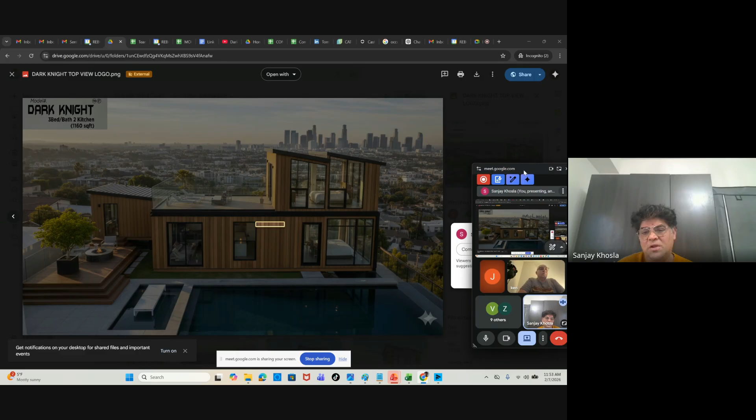And the reason this was built this way was because we built it so that we can duplicate it and use a lot of those concepts. You guys may have already heard of verbages like DFMA, panelization, modular, and modular integrated construction. So those principles, how do they apply? Hence we started with a smaller prototype, like a crawl, walk, and run.

Really in this community, what we're attempting to do, rather than go big and talk about 200 units, we want to be able to model 2 boxes and use all the different principles from a DFMA componentization perspective, and really iron out all the bugs from a training perspective, and see how those components get approved according to Ontario standard.

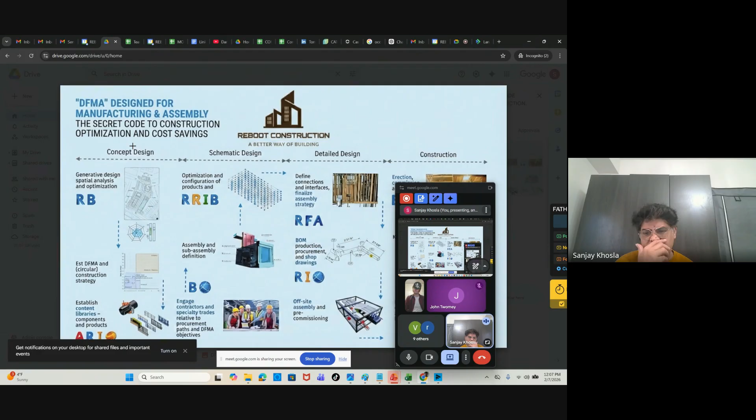I know there's a company out of Texas doing that, but again, a lot of noise because it's only addressing the shell, the envelope, which you can easily use through panelization. So how do you use just panelization power to cut costs and arrive just in time, cut cost on labor, cut cost on different components, and have them approved at the same time?

How do you get to that holy grail? And having gone through all this R&D, I think the secret code lies in DFMA, which is design for manufacturing assembly. And DFMA, in my mind, is not just a few components - like you have a wall panel, a full wall with a window panel, a roof truss.

Yeah, those are great components. But I think this entire life cycle that's being demonstrated - bearing this in mind, this is almost like writing a software product. This is how we do analysis, design, construction, testing. This is a life cycle for software development out here. So how do we take that framework and apply it in the DFMA?

As I just shared an example of generative design - once you come to this level, you can give an investor a package saying you can build 6 units and this is your cash on cash return, quickly, not making the investor spend about $30,000-$50,000.

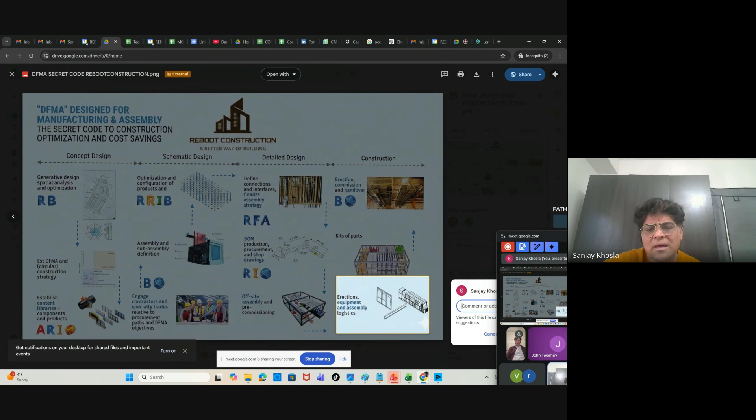We've held their hand and really closed the loop out here. This achievement of hand-holding the investor from birth to handing over the keys in this discrete DFMA manner, I believe is super critical. I'm going to pause here because I'd like this to be more of a community effort. I don't want only my ideas to be entrusted, so I'm going to invite some thoughts on DFMA, or their points of view here.

Folks, I'd like to see your point of view on what we're talking about with DFMA. I know, John, you've done a lot of this componentization, working with companies that are already doing it. What are your thoughts on what we're sharing and trying to do? Are we headed in the right direction?

Totally. I think modular fabrication, by its very nature, is DFMA. Prairie can attest, we would have 70 pages of details for a chassis, for a kitted out chassis. And Prairie, remind me, were you a SolidWorks designer? What platform were you working with?

No, I was a Revit designer. Okay, well, all of our architectural drawings are in Revit, but with SolidWorks we would produce LOD 400. Everything was about how to make it simple for the shop, and I think we kind of solved that problem a couple years ago. Go ahead, Brian.

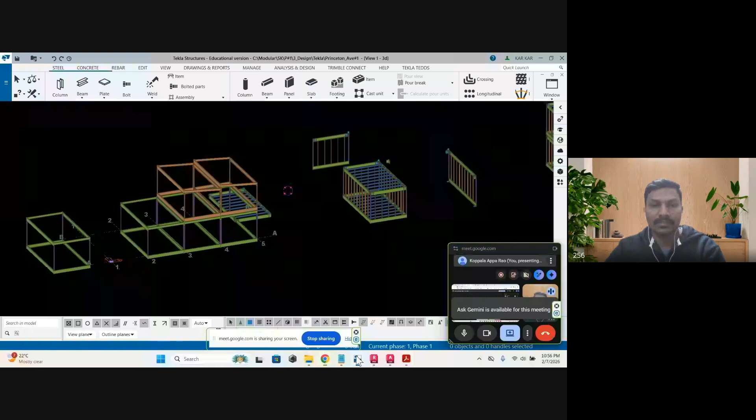Are you able to see my screen, sir? Not yet - yeah, it's coming up. Thank you, Koppala. Yes sir, this is the model that I have prepared. It's in a very basic shape only, but I've worked on the connections and the box frame, the moment frame, how the skeleton of the structure can be done.

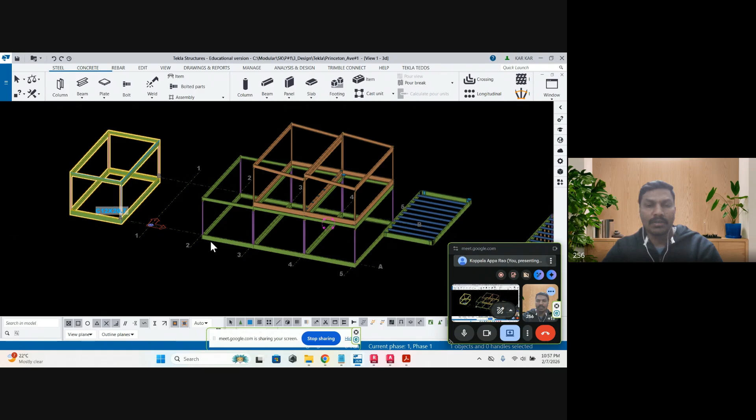This has around 4 modules on the bottom and 2 modules on top. This is already prepared to make the LGS structure inside it, so that we can put in LGS studs and all, and then finalize the design.

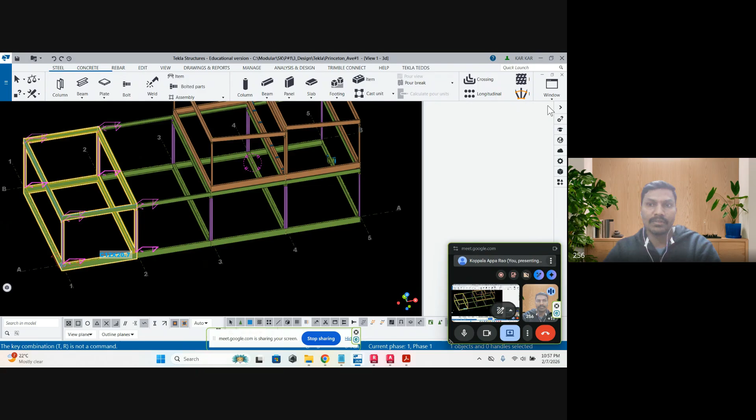So all together, if we combine, it will look something like this. So all 4 modes - 6 modes - are separated. It can be shipped separately to the site with all the finishing like floor finishes, ceilings and interior everything. You can combine and install everything in the factory and then ship it to the site.

So each module can be connected to other modules at the site using small, simple connections. I'll show some sample connections for how it will be connected on site. We have a bolted connection at the corners so that fixing can be done even on site or even in the factory.

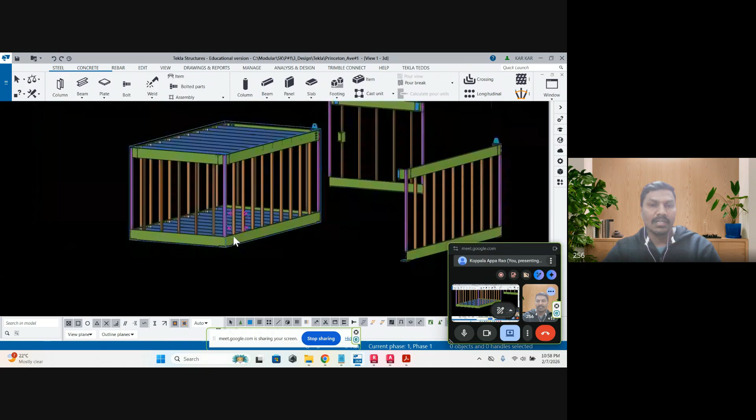So the module box contains one base frame at the bottom with 4 C channels, and one ceiling frame at the top. The top 4 C channels form the ceiling frame, which will support the ceiling members and floor joists, and can also support loads.

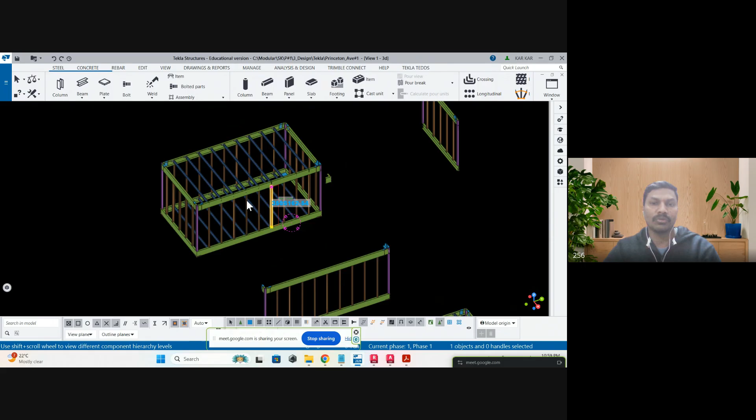And of course we have the studs on all 4 sides of the module. This can be very light gauge, 18 or 20 gauge or even lesser, depending on the design. The studs can be spaced at every 2 feet. Depending on requirement, we can place studs or leave it open where we have a combined axis between modules in the final building. On all 4 sides we can place studs, easily connected to the C channel using screws.

Once the module is done and shipped to site after fixing ceilings, walls, panels, and interior, we can connect module to module easily by placing one module on top of another with simple connections. Before that, for the lifting purpose we can use the same connection with lifting shackles, lifting lug, and all.

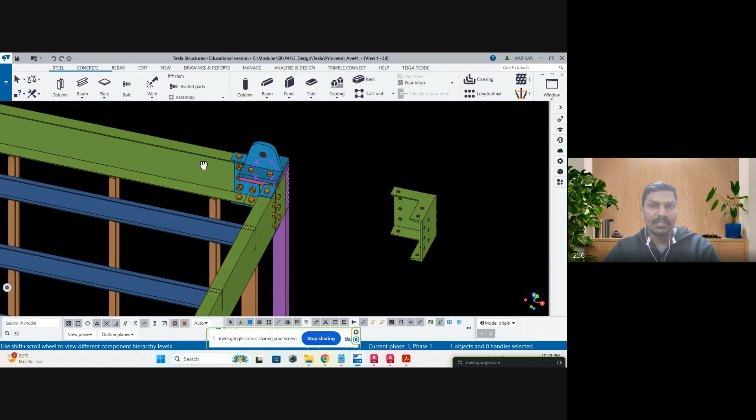At all 4 corners we can place the lifting lug so that we can lift it easily. The design can be done using a dynamic factor of 25% or 50% extra, depending on the codal requirement. We can design the lifting lug and get it certified from lifting engineers, so that when lifting the module to any number of floors, it won't create any issue since it's already designed for dynamic loads.

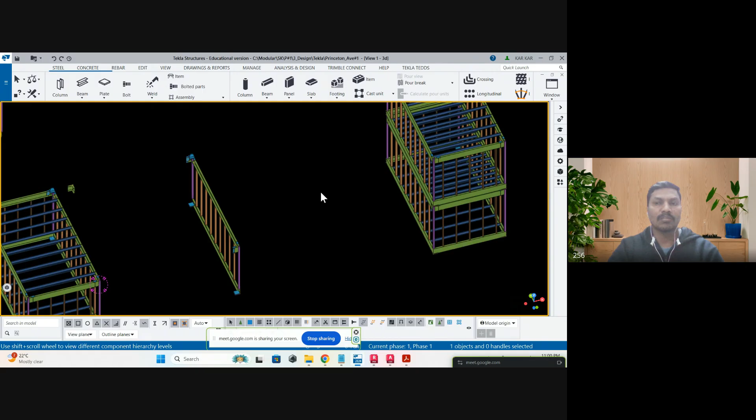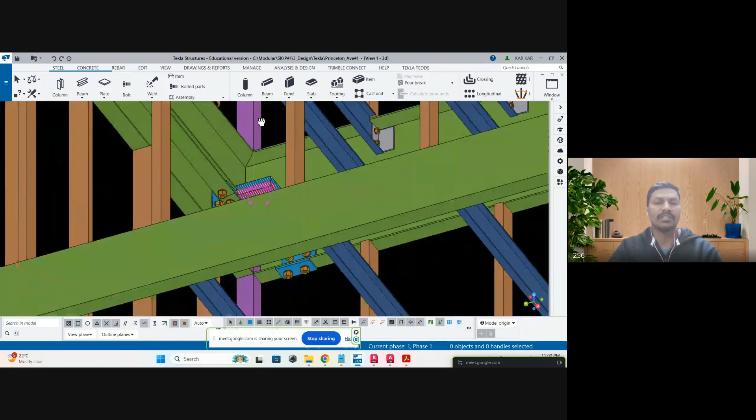After placing the first module at the site, the second module can be placed on top of it easily using the lifting lugs, connected to the bottom module using the same connection. It can be fitted with 4 bolts, or we can redesign with fewer bolts, so it doesn't take much time. It will take less than an hour to fix the bolts at the four corners, which will be connected to each other.

We also maintain a gap between module to module for deflection. When the floor deflects, we give allowances so it won't touch the ceiling frame of the bottom module. We can give this gap and optimize the number and sizes of all members.

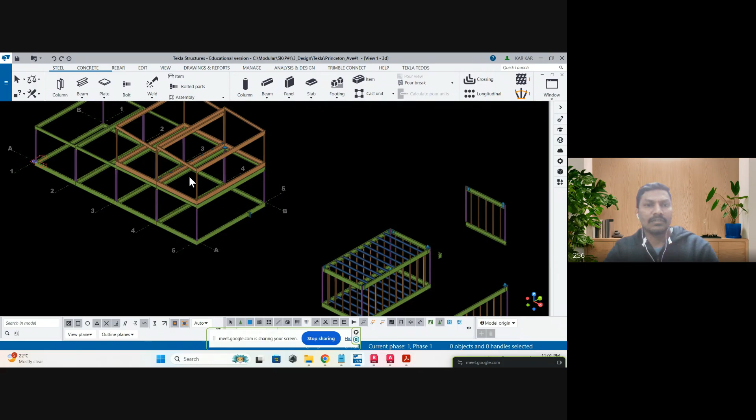When we connect modules side by side, we can also give some kind of connection. Between module to module we have 2 module C channels, connected on site, but we can use small shear plates or loose plates to connect both modules together at every 2 feet, 1 feet, or even 3 feet distance, depending on the design. This way, when all modules are connected on site, they act as one building to take wind loads, seismic loads, and everything. It's optional, not mandatory, to have the side-by-side connection, depending on the design — we can do this one also.

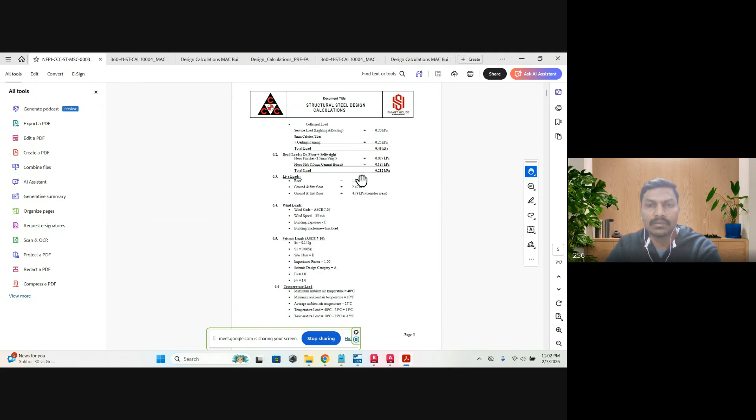This is a sample module, sir. I will also show detailed connections from my previous designs. This is a small warehouse I did in Qatar, in the Gulf, around 150 meters length and 30 meters width. It's a warehouse, but office kind of warehouse, G+1.

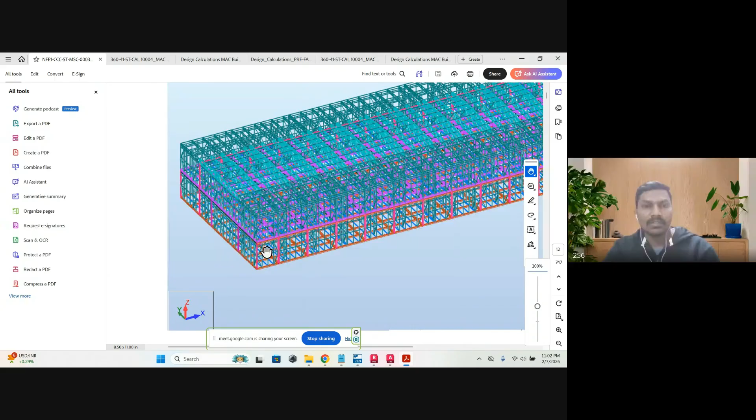It's a combination of module and site construction. The first floor is site-constructed panel, and the ground floor is the volumetric modular structure. So we used a combined design here — half done in the factory, half done on site. We calculated all the wind loads and everything using the Robot Structural Analysis program — wind loads, dead load, live load, and everything.

I will just show what are the loads that we have considered. The grades, normal grades only we can use. High grade like grade 50 we can use, so it doesn't require to be very high grade. Even grade 43 also we can use, 275. The yield strength, 250 yield strength also we can use.

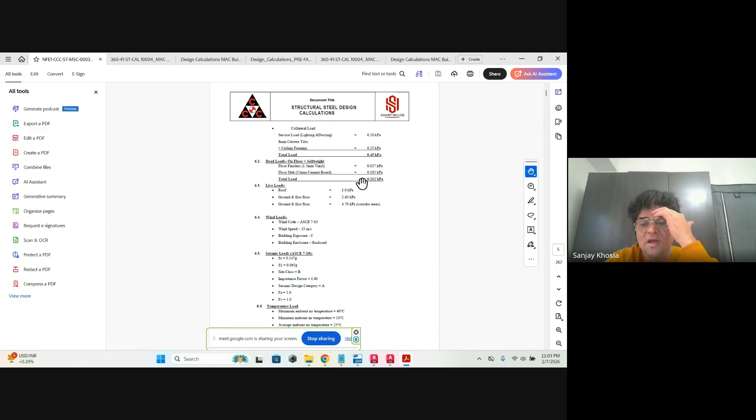Yeah, Koppala, this is a great presentation. Before we get into more of the technicality of structural, since there are a lot of experts on this call, I'm going to invite some comments, because the intent here is how do you build a cost-efficient and optimized connection, kit of parts if you will, not necessarily just modular, but kit of parts where you can literally assemble even the structural framework on site.

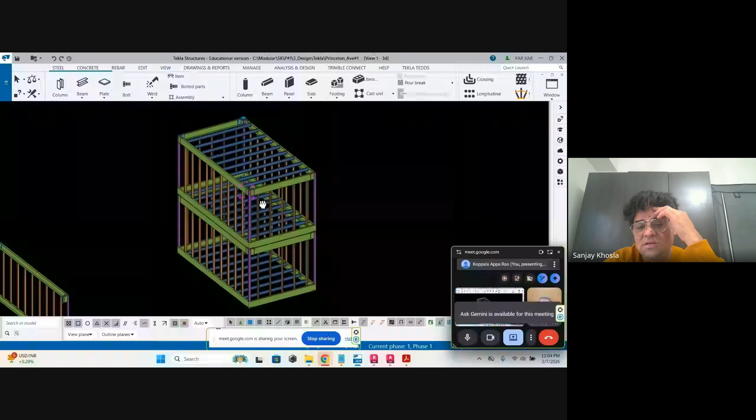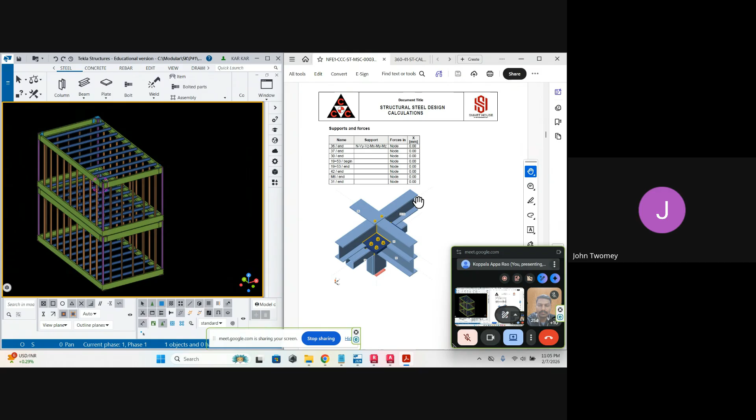I'd like to invite some questions, and you can keep the model up, Koppala, and maybe anybody that has questions to ask that can help us design a more effective connection, because I think the secret sauce is in the connection here. John, any thoughts on the connection side, since you guys are already doing quite a bit here? Connection's critical, yeah, absolutely. We're always in search for the next best thing. We've got a couple choices in the market now.

It would be prudent always to have alternatives in case of supply chain issues and so on, so we're always keeping an eye out for something affordable in our market. We're really interested now in light gauge steel and cold form. Do you have questions about the connections, Koppala? Look, I do, but I know my limitations, and I'll let our structural folks deal with these matters. I have Sumeet, who's a professional engineer who actually stamps these as an approval. Sumeet, do you mind chiming in on the connections Koppala is showing? Any thoughts here, what would be the challenge to get this approved? Connection wise, I need to check the calculation first, but connection wise, it looks good to me.

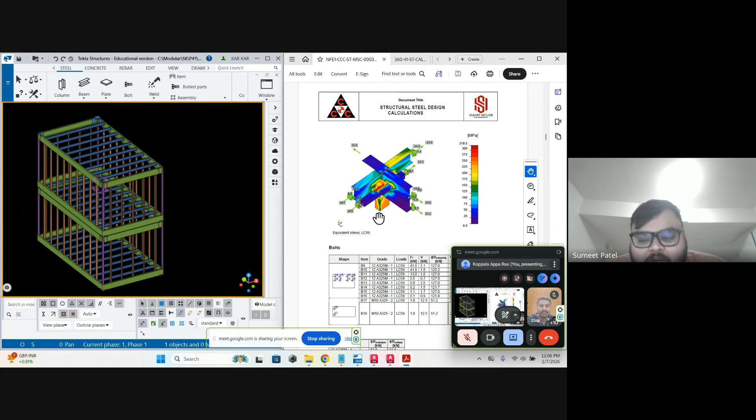I have a question for Koppala about the diaphragm continuity and how the diaphragm load is transferred between the connections, so we can have a proper lateral load path in this system. I've never worked with prefab steel moment frames where we make a connection of one module above the second one, so I want to know how the diaphragm continuity of one floor level will be transferred in this connection.

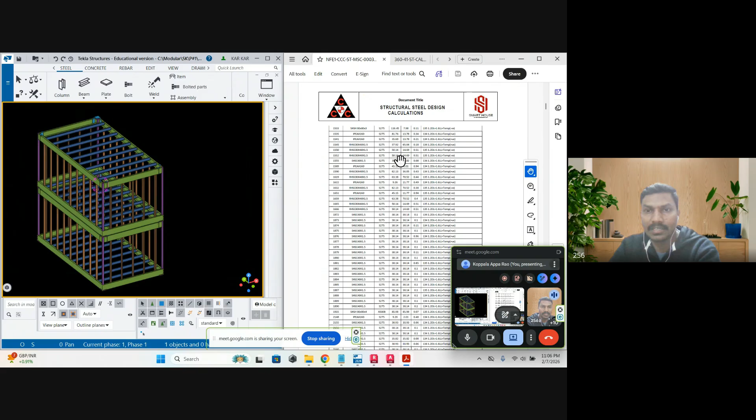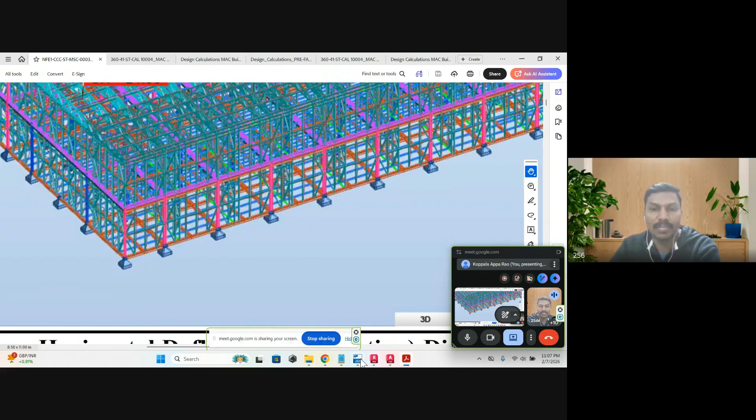Yes, sir, actually diaphragm is a different concept. While we are designing this project, we did not consider diaphragm separately, because we modeled everything in finite element modeling. I will show you the structure here. We put everything in the Robot structural analysis model, and connected all the joints using small plates and release connections. Since the module is a box frame, and the nearby module is also a box frame, we're connecting full module to another module using side-by-side connections, like what we have seen here, so the diaphragm can be achieved using these small plates, because it's not separated.

These four C channels are connected together, so it will form a rigid base, and the nearby C channels are also rigid base only. So they were connected together using the small plates here, and even the corners also have connections. I will show that connection.

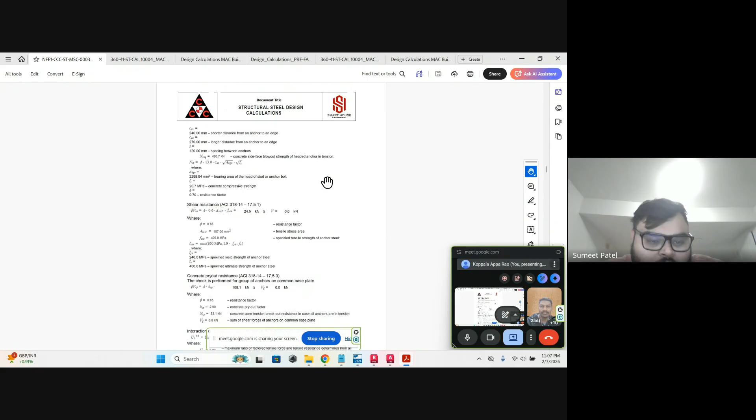What is the floor system here, like the joist and the deck on it, or the plywood? Yeah, joist and a cement board system. Cement board system, okay. I'm not sure how the Saudi code or the Dubai code works. I'm sure Qatar is following a code, I guess ACI, sorry. Yeah, Qatar, ACI? Qatar code only.

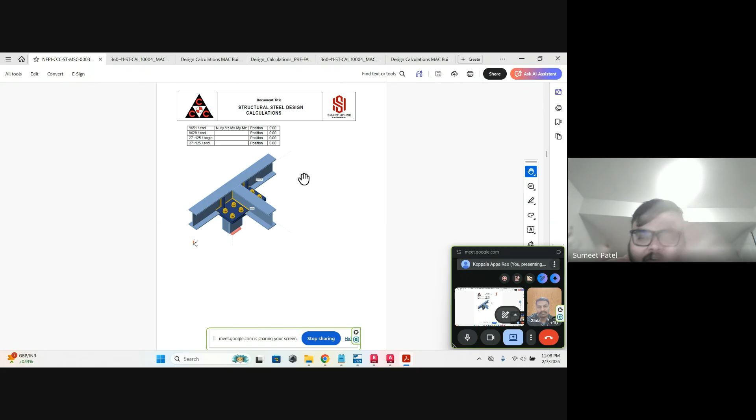Yeah, but design is AISC design only, and wind loads, wind speed is as per the local condition, but wind analysis also done as per the American code, ASCE. I think we can more redefine and do a more localized calculation in terms of the Canadian code, because in Canadian code, if you're not considering lateral loads, wind needs to transfer to the diaphragm, and the collector should be designed to take that diaphragm floor load, then it transfers to the lateral resisting system. So sure, that we can design, that's not a problem.

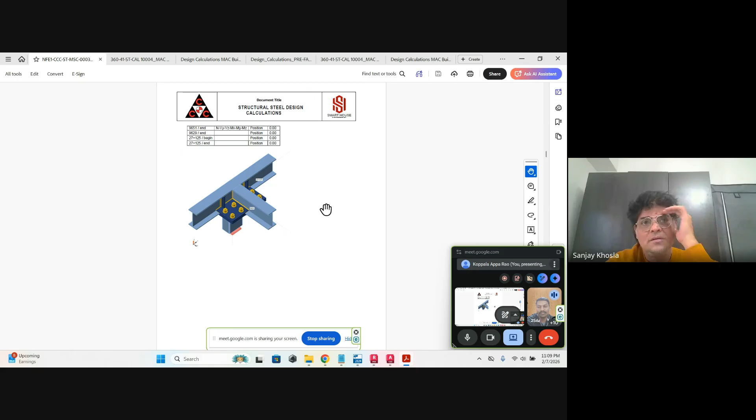I guess it's a cool project, and I can prepare one sample calculation for maybe Toronto, or maybe another location, like Hamilton, which we are talking about. I have not done this kind of project, but I have done a project where we use cold-formed steel panels and do panelized work of the modular system instead of the 3D module, the 2D module design. That is actually widely used, very widely used, and it's economical.

Actually good for transportation sometimes, because the site has its own limitations in 3D modules due to transportation. But I'm not that experienced in 3D modules.

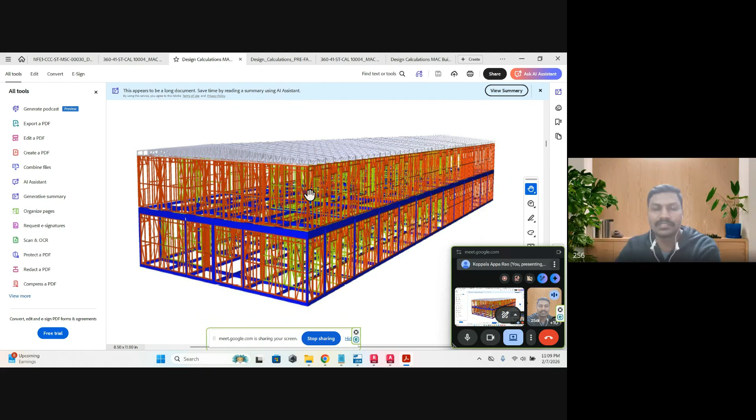Yeah, that's a great call out from a panelization perspective, and how you can orchestrate all those connections, not necessarily volumetric, as people call it. Creating designs that are panelized lends itself more to true DFMA rather than just monolithic volumetric.

I know that Vishu, you've done a lot of volumetric type work. What are your thoughts? Any questions on what Koppala and Sumeet are talking about here, Vishu?

Sure, can you guys hear me? Yeah, yep.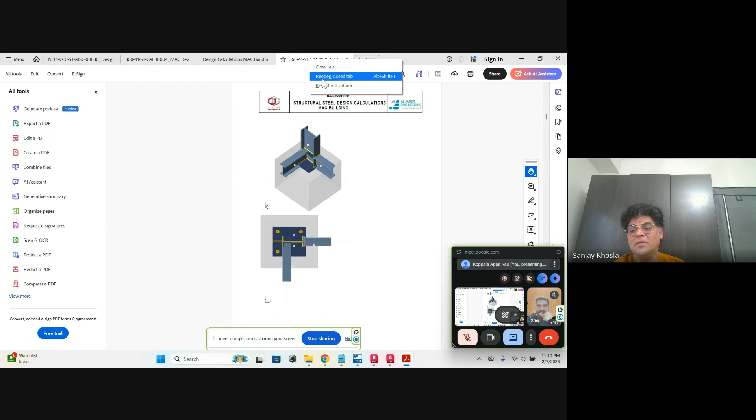Okay, very great design, Koppala, and thank you all for the fruitful conversation. Really appreciate your thoughts.

My question right now - I've been working with modular for the past 3 years, and I have a couple of questions. At the initial stage, I'm not clear how we are going to do it - element by element, like paneling by paneling, or ship the whole thing together? All the connections, structural connections, and load transfer will depend on how we assemble it. Will it be prefab factory built, or element by element, like walls and flooring system by flooring system?

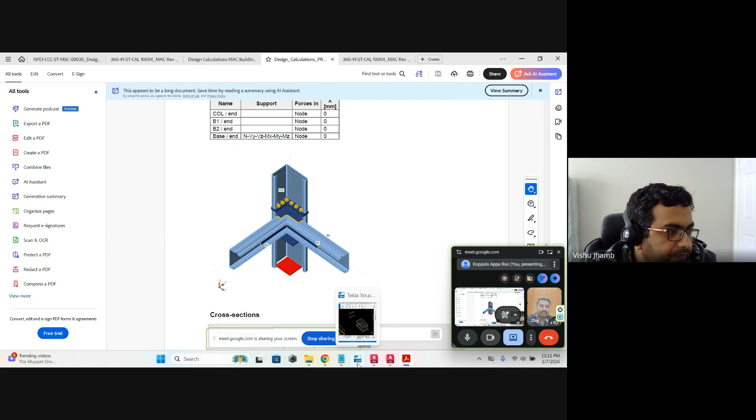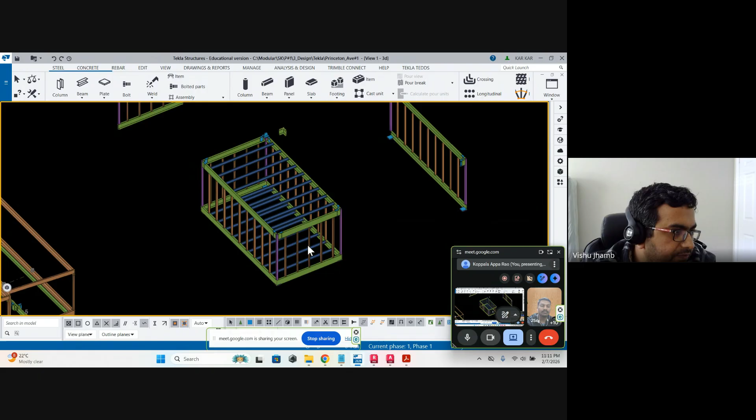Having that clear is important, because the design looks great, but we need our initial thought on how to proceed with the modular - for example, are we going to ship the whole wall or the whole floor piece by piece? Because if we're shipping the whole thing, we need to consider so many factors.

I see some connections done at the corner. It's great, looks great, but when we're joining two modules together, the interior connections have to be done without damaging what we've already achieved at the site. Can it be done externally, or do we have to rip off some floor system and go inside the module to make the connections? We'll have to consider that as well.

Since the modular connection is done sideways as well, how are we going to achieve that on site? That's another question for me. Right now, that's what I'm considering, and there's an alignment thing I'm thinking of after taking that lug off - how we are going to align our modules, that's another thing.

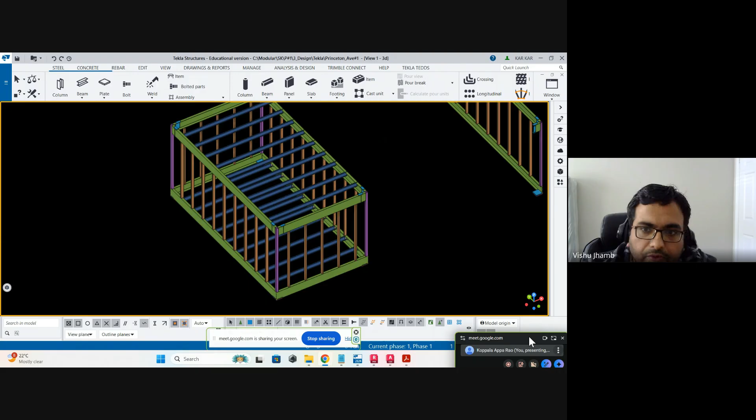Koppala, do you have any thoughts on that? Sure, I will share actually.

There are different ways of doing modular structure. Some people do paneling - that's where the basic LGS system started. They create panels at the factory and ship them to the site. Panels are erected panel by panel, wall by wall - partition walls, floors, walls and doors, everything is a panel. One wall is one panel. They connect everything together at the site, creating one box, one room at a time, then another room.

Then they attach other components like wall boards, insulation, floors and everything. It won't be exactly the same as conventional structure - it's a bit more advanced and more prefabricated. That's the paneling system.

But when we come to the volumetric system, everything is done in the factory only, and one complete room can be constructed within a box. All the ceiling members, floor members, wall members, even MEP works - mechanical, electrical, plumbing - everything can be done in the factory only, and they leave small joints.

If one module's width is around 10 feet but the total requirement of the room is 20 feet, then only 10 feet can be done in the factory, and those two modules are connected on site. They leave a small gap between the two modules' connecting area in the factory. While connecting on site, small adjustments and joints are done there.

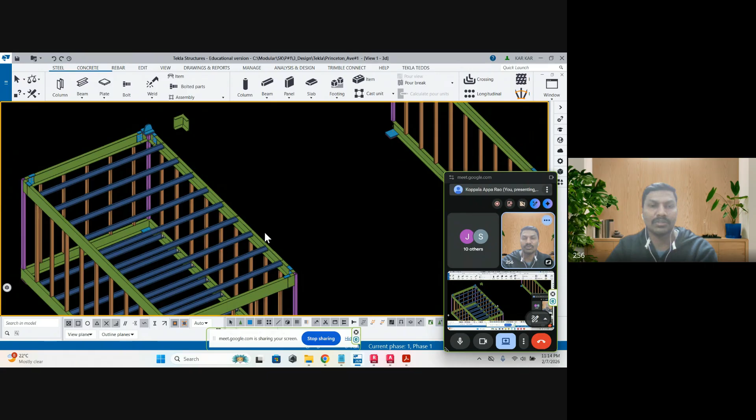And when it comes to module-to-module connection, how do we access this area? Like we have one connection here.

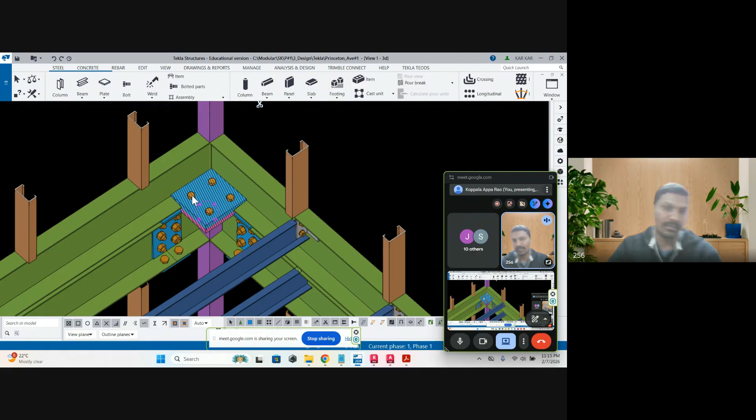We have one connection here, and once the bottom module is done, when placing the top module on top of it, this bolt provision is there. But how to access that means we have to leave a little gap in the floor or ceiling member. Generally it will be left like 1 foot by 1 foot or something. They will leave a gap and do the bolting, and once the bolt tightening is done, they will fill the gap. So that is how they will access the corner. This can be done to all four corners.

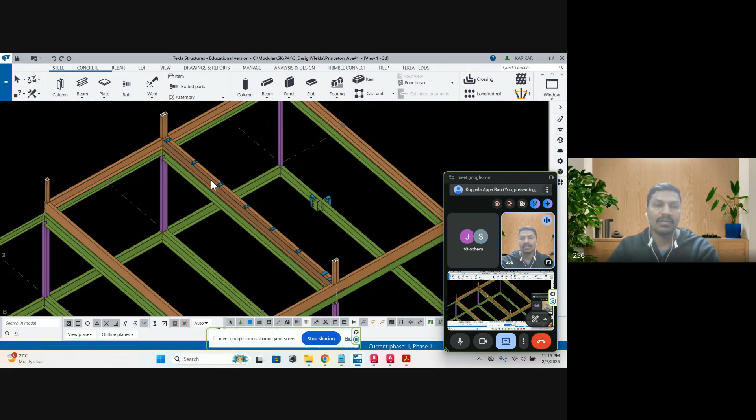When it comes to side by side, like we have here, some people follow this, some don't. It depends upon the span of the module. If we have a small module like 20 feet, we really don't require this kind of connection side by side. Even if we do require it, we need to leave a little gap here in the ceiling and floor cement board, and that gap can be utilized to fix the bolt.

Once the bolting is done, the bolt looks like a head bolt here, but it's actually a countersunk bolt. It will be flushed with the gypsum board level. So once the bolting is done, they will place a little bit of gypsum board or some kind of joint material there so as not to show the joint outside. So this can be achieved also.

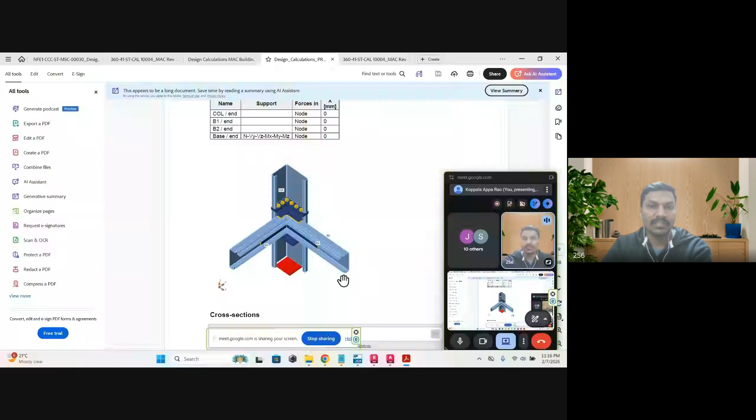And this has been done practically also. This project was done around 4 years back. It's completely designed, detailed, and government approved, everything. They have followed American codes only.

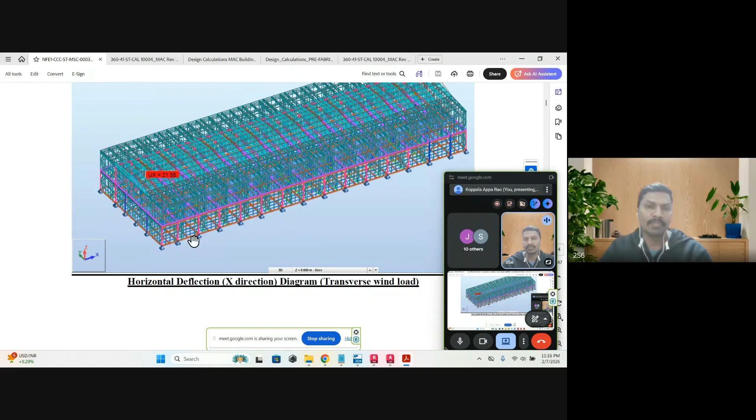This is a very large building actually, around 300 feet in length and 60 feet in width. So more number of modules are there. Design, detailing, and everything, plus fabrication, was also done in the factory, and connections were also designed so as to be able to connect on site. This kind of connection was also designed in IDEA StatiCa.

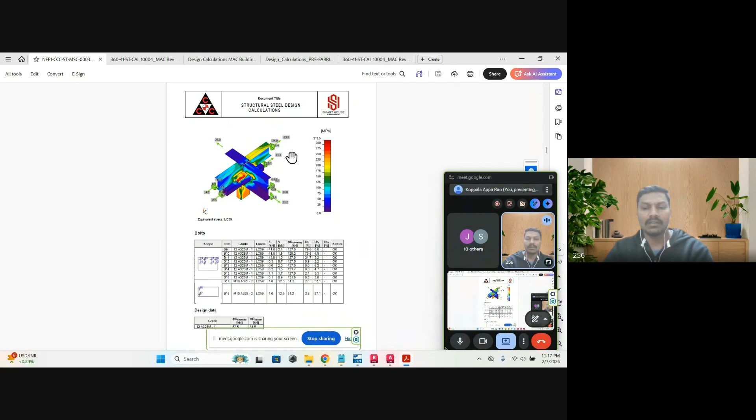So we can see even small welds, if it is fail or pass, using the finite element modeling and all. And we can apply all kinds of loads. You can see here axial loads, moment loads, all kinds of loads we can apply here, and verify whether the connection is able to withstand all the loads or not.

Okay, like this. Hopefully that answers the question here, Vishu.

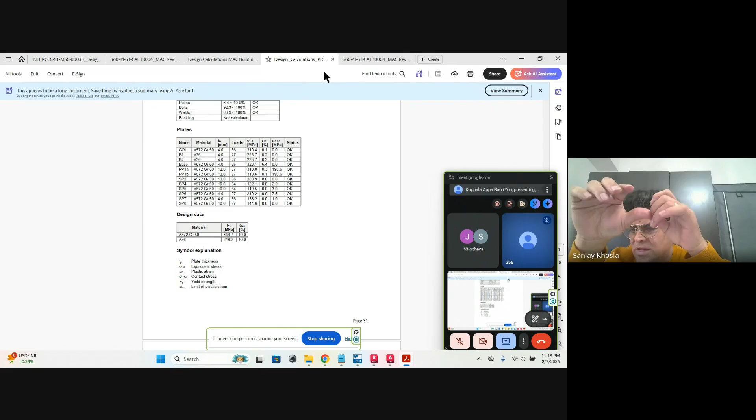I wanted to make sure that we're also covering some other components as we're talking structural. My idea was to bring Koppala to talk about a component, and certainly we can regroup certain team members. I can set up a follow-up call with certain team members that are interested in different aspects. But before I move into the other components, I know that Prahrie, you've also done a lot of modular.

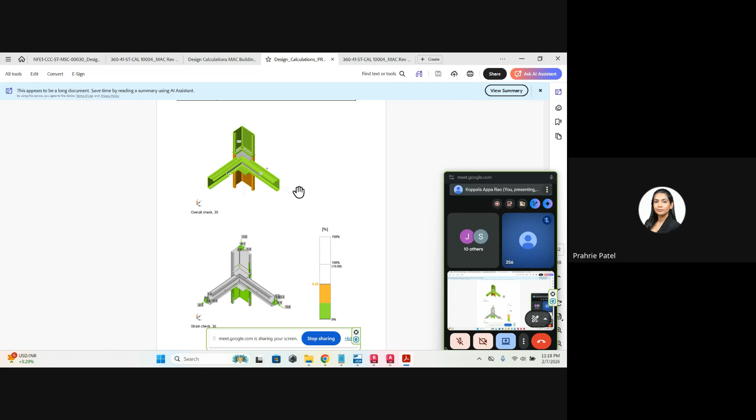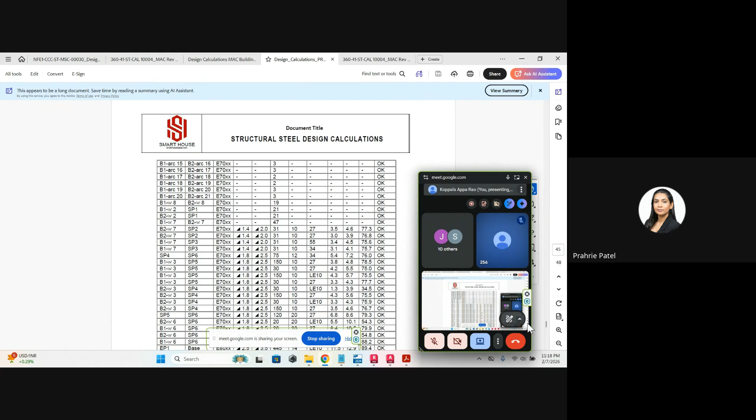Any thoughts or inputs on what is being discussed here, or is this more on the structural side and not in your area? I think this is more on the structural side, but at the same time, how I see design is, with these aspects, there are problems that we could potentially come across on site. So potentially thinking of, what Koppala is sharing right now, and what he mentioned earlier, that this would be a component that would be handled on site. I think things like that - what are the things that are going to be handled on site, and how are we going to try to minimize on-site work as well, and try to eliminate as much as we can. I think that's the main idea.

Absolutely, thank you for that input. I know Jega has already been working on some connections. Jega, do you have any thoughts, because you have tremendous experience and background doing aviation, much more complex components? Do you mind chiming in on what you're seeing here, or do you feel different here, Jega?

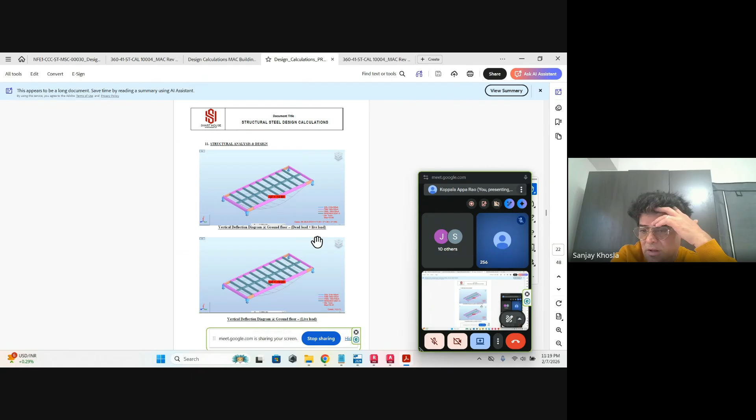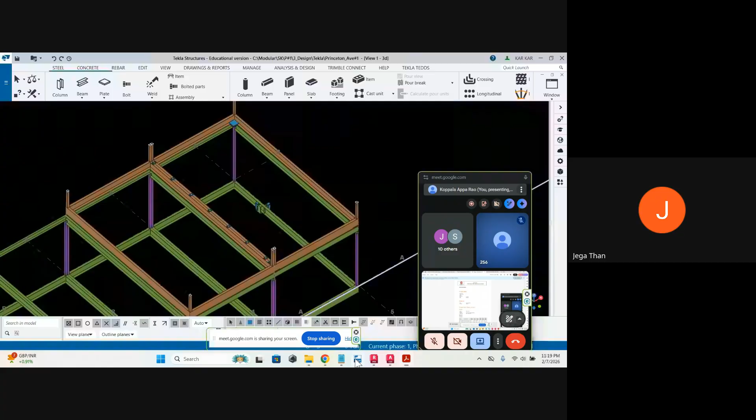No, yeah, I think we're pretty much all on the same page. It looks good, but we're always going to have an issue on site, regardless of how perfectly it's built - it's depending on the flooring, where it goes, how we handle it. So there's always going to be an issue on the floor when we do the assembly. So what I'm looking at here, the way I was planning to build everything is in components, in parts - vertical post, horizontal post, and all the struts going to be bolted on site due to shipping and everything. I think that's the best way to produce it in a cheaper way, rather than having everything built in the factory. Basically, it's going to be all bolted on site.

And of course, I'm working on some of these connections. I'm going to make some prototyping. Once we're all on the same page, I'm going to make some joint connections to be done here, so you can show it to the architect and see how that works out.

Absolutely, so yeah, that would be super helpful, once you come up with what you're already seeing here. And I agree with you, a lot of kit of parts. I'm going to move to John.

I know, John, you're already using Metal Lock. How are you seeing what is being discussed here from Metal Lock? I know they've already perfected all of this stuff. What are you seeing as the difference between what the team is discussing as opposed to Metal Lock, John?

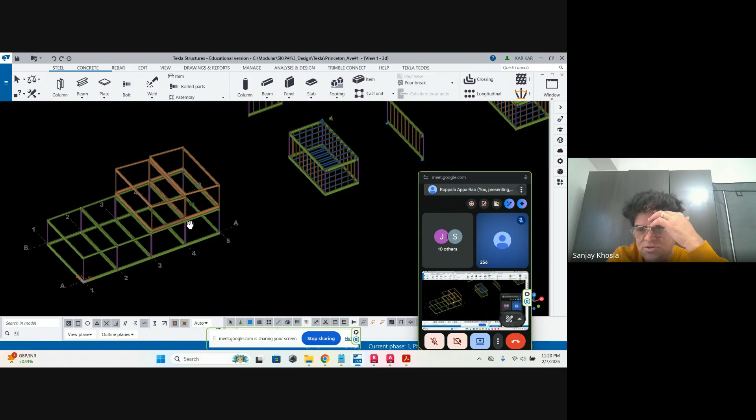Well, listen, as architects, we are agnostic to materials, agnostic to the structural connection product. We like the notion of off-the-shelf products, but a number of clients have relationships with fabricators who have a sort of generic mild steel approach. This looks totally feasible. Building for cold weather climates, we have a lot of issues, a lot of code requirements and so on.

Let me ask a question. What was the purpose of the building in Abu Dhabi? Was it industrial or a warehouse of some nature? It's a kind of office purpose actually, for oil and gas field purpose. It's a temporary office, built for temporary purpose only, but the lifespan is around 10 years.

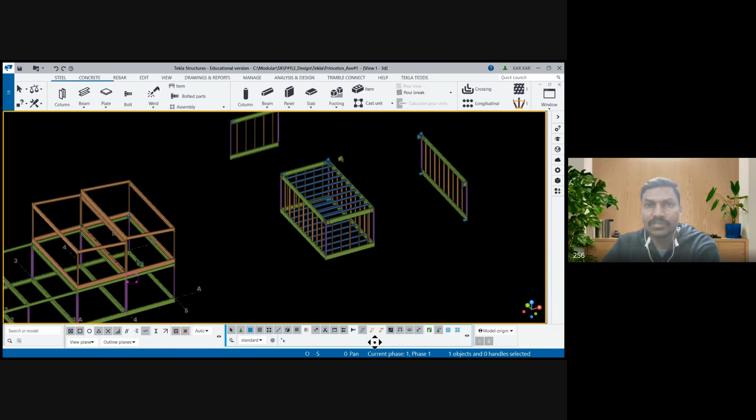So you use the same design for workforce housing? Yeah, housing, right, we can use similar concepts. We have done small projects also using the same concept. So basically, we have to build as much as possible in the factory and reduce the work we do on site, because in the factory it's a controlled environment. We can access tools and things can be fixed easily within less time and less manpower.

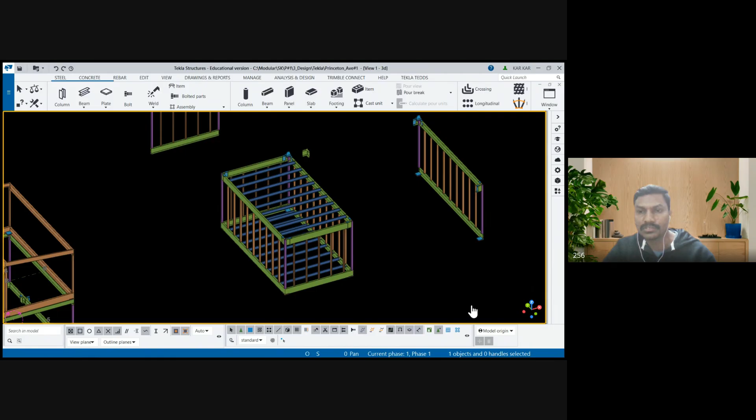And is it like a typical I-beam? What is that material? Actually, I have different designs. In one design we have used... I will show, so actually, yeah, this is the I-beam. We have used IPE section for the ceiling member and the column members. Let me show the full screen. This is an I-beam. Okay, the connection I want to see.

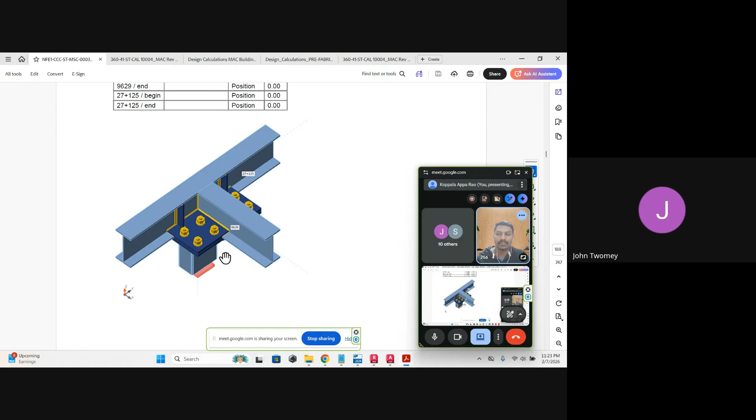Yeah, this is the I-beam connected on top of the tube members. Vertical members are tube members. The tube members will be placed at every corner, every node. Interesting, so you're using like an HSS? Yeah, that's what we work with.

Yes actually, Z Modular, of course, is a manufacturer of HSS, so we had to integrate it into all of the designs, and it was a fabulous product. Perhaps over-engineered for 6-story towers, but great stuff. Okay, well this looks totally feasible, as long as it can get a stamp in the market, and it pencils, as we like to say, Sanjay.

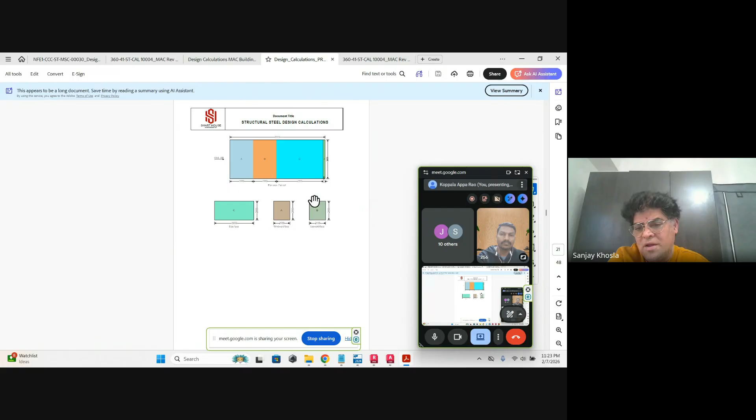Yeah, that's a very critical point you bring up, John. So my next question would be, sure, we're doing a lot of this R&D. Do you know of any connections, and this question is to the entire team, that we can pick off the shelf? I think Zach kind of pointed out to that. While we're doing the R&D, we're trying to find optimal ways of building it. The bottom line is you have to look at the cents in the dollar, right? We could be doing so much voodoo magic in R&D, and then coming to the finish line twice as much the cost, it doesn't serve the purpose. It defeats the whole purpose, right?

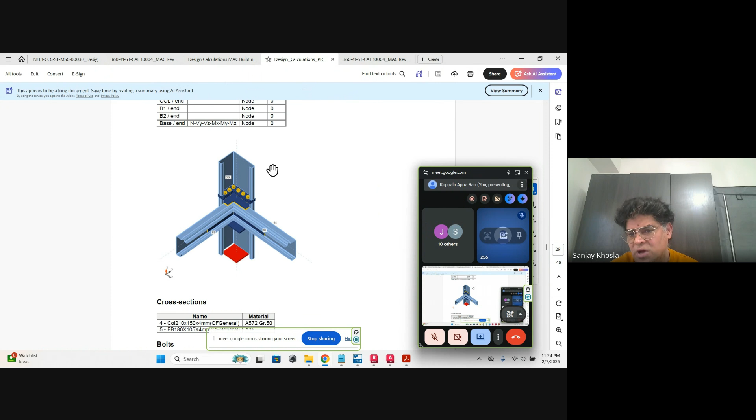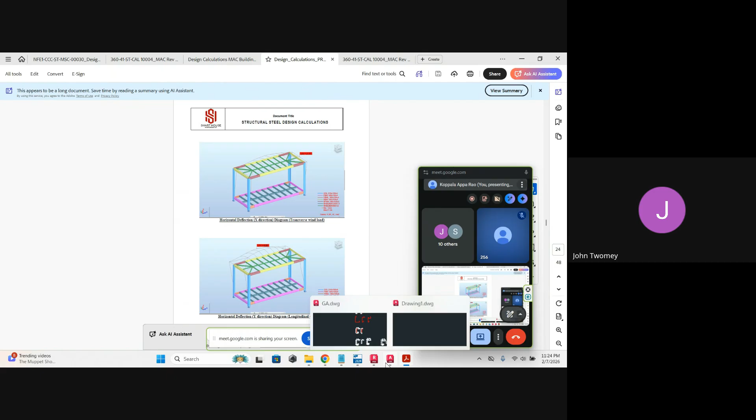I would start with John. John, do you know of any connection companies that already sell this prefabricated system that's already approved and we can plug and play right now? Well, you mentioned it, so you've got Metal Lock, which is being represented by Lanex out of Windsor, Ontario, and they're marketing that to modular fabricators. You've got companies like Faro who have their own proprietary system that I'm not familiar with but will soon be, I hope. There's a large Japanese company coming to Southern Ontario called Sekisui, and they've got a non-proprietary mild steel approach too that we hope to learn about in the coming weeks.

So no, I think right now Metal Lock and of course Z Modular's Vectorbloc system, called the Z-block system, are the only two that I can say are proprietary and owned by somebody and protected internationally with patents and so on. So I don't know if I answered your question, but no, there's not.

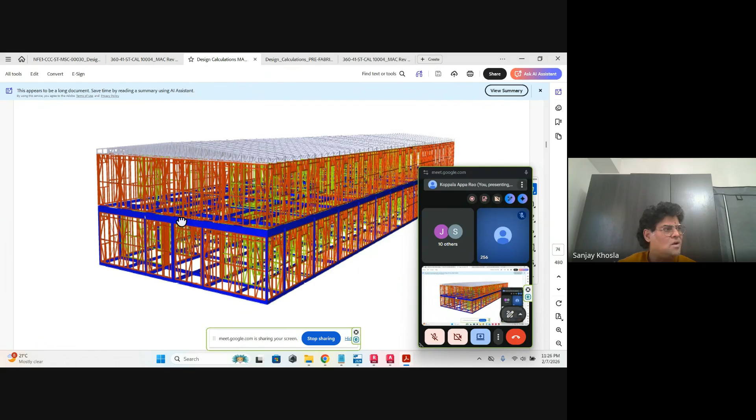I heard through somebody who's working with Zach, introduced us. She spoke about Contex or Connex doing these connections, basically prefabricated, and maybe Zega's also got a whole connection of all the prefabrication companies that can prefabricate it.

Maybe we'll come up with some design, but I want to be mindful, at least from this community spirit perspective, that we're not lost in the sauce, if you will. What are we getting at the end of the day?

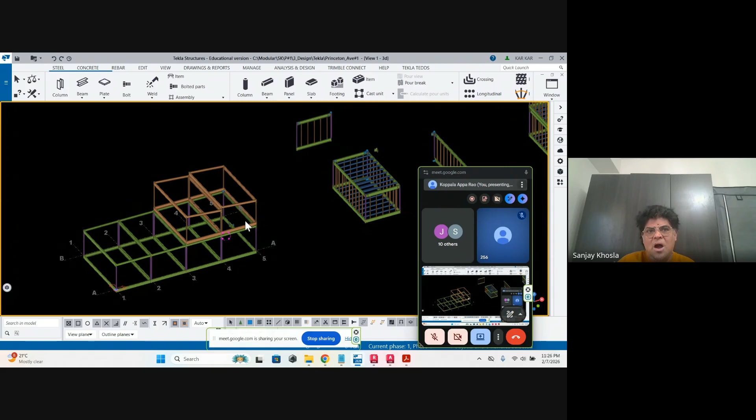The target for me is really that $150, $160 per square foot. How the heck do I achieve that? I spend sleepless nights behind that, and Ken and myself are committed to it, whether we need to bring materials from China or India and collaborate on that global supply chain. How do we knock down that pricing? I think the moment we reach that number, we'll all win in this journey. That's the focus here, John.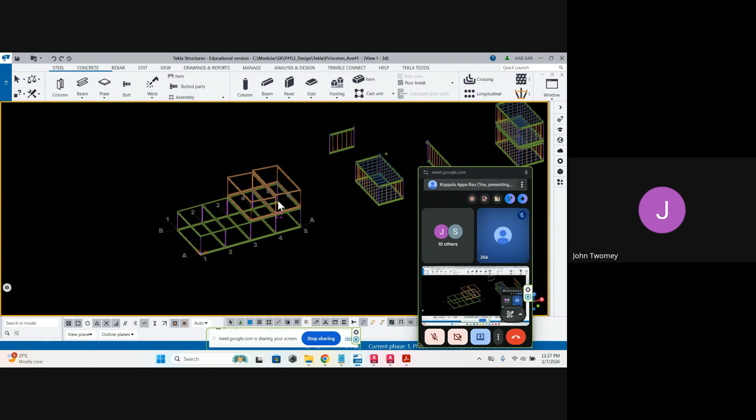Yeah, that's agreed, and that number is the sweet spot, isn't it? So we're working towards a sustainable $250 per square foot with anybody's structural system, anybody's connections.

I'm surprised by the numbers of 250, and I'm lost in this whole world. To date, when I call up builders in Texas, if you talk to them about $100 a square foot, they start laughing at you. They say, what are you doing? And my mind goes, how the heck are they achieving below $100, those builders?

There's a lot of factors for sure. In Texas mainly they are doing a prefab cold form steel panelized system instead of the modular system, for residential projects, not commercial. In Texas they use FrameCAD or that kind of software, use the panelized work and do the construction. That's achievable in cold form steel, not achievable in structural steel, for sure.

Oh I see, that's a good call out right there. I don't want us to get lost in the sauce, as I said, keep the eye on the prize, so that when we're talking to an investor, we can say beyond benefit of doubt that if you work with us, we know how to cut down the price, and that's where we're going to gain our position of equity share in that project, right? Otherwise it's all artistic work, basically. Would you agree on that, John, or what do you feel?

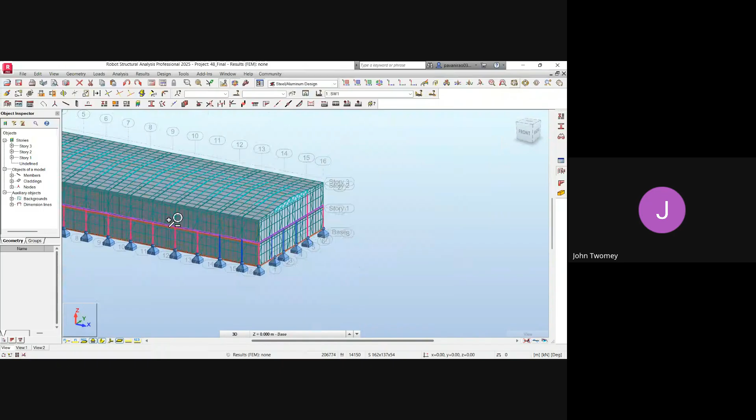But we know that we've got some very competitive customers, and they need the lowest dollar per square foot as possible. Absolutely, particularly those in the workforce housing industries in the Caribbean. Yeah, and in the Emirates as well, where we're getting the same sort of conversations.

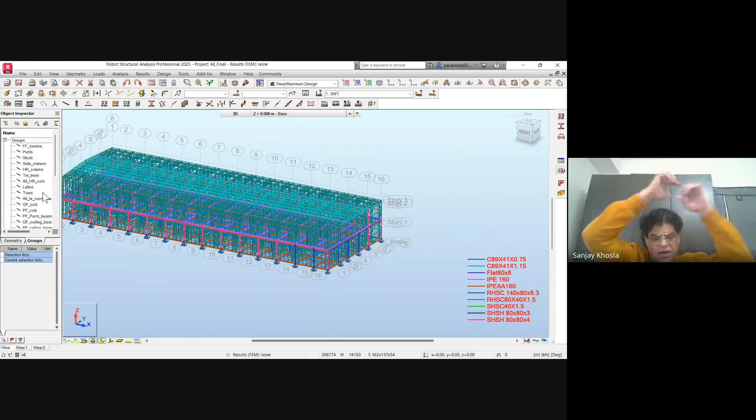The sentiment I'm gathering here on the call with all these wonderful experts is leaning towards that whole panelization. And I was listening to Amazon - when Amazon funds, you better be aware they are technologically really savvy, or else they're not going to fund it. At least that's my knowledge, and you guys are industry veterans too. Plant Prefab, okay, got to look up their interview, I can share it with the community. Plant Prefab was talking, and I was going to get interviewed by Dave Cooper in California. He talks a lot about this side, goes to all these factories.

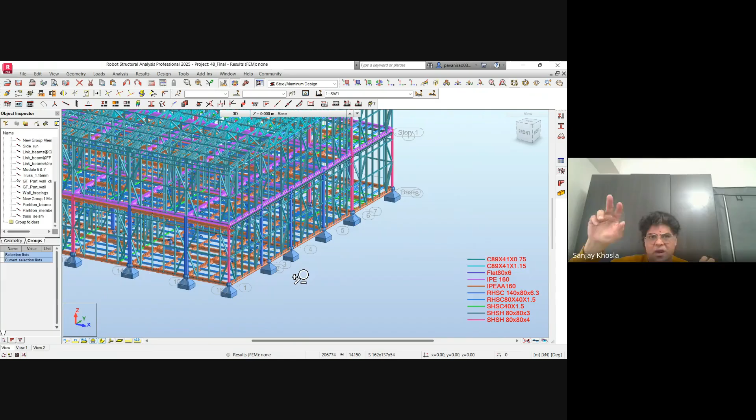But I was seeing the interview with the Plant Prefab guy, and he swore the cost optimization is a hybrid of modular integrated construction, which means bathroom pods and kitchen pods. That's how they push the word modular, but most of it is orchestration of panelization, prefab. They swear by it, that's how they're able to cut cost and not go one over the other. So it's that orchestration and combination of panels, mods, but very specific components, basically.

Would you agree on that, John, or do you feel otherwise? And maybe priority also - you guys have been talking to various customers about integrating pods into their mix, which would allow for a combination of panelized with perhaps mechanical rooms, washrooms, to come volumetric in a pod.

Sure, those things work together, right? They cut costs. What costs are you cutting? When you're panelized, you've got a lot more work on site. So if you've got washrooms and bathrooms already 90% done in a factory, that's great. There's a lot of labor fitting out a bathroom, plumbing, tile, and whatnot. So do that under controlled circumstances in a plant and drop it in and build around it.

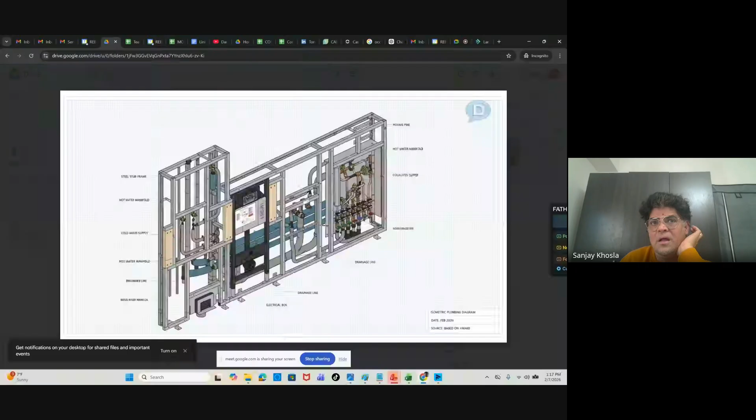My first component, or assembly I would call it - we can interchange that - the idea here is a bathroom and sort of a MEP panelized panel, if you will, that goes on site. Literally you may not have to do any certification, because if we take the panelized approach it can become part of the on-site inspection. If we do not take the panelized approach, still building this entire sub-assembly of MEP wall panel for a bathroom will be super helpful.

It basically streamlines all the trades, brings everybody on one floor, and we're able to get this sub-assembly. Because I look at a house almost like building a computer - if you can build the CPU parts, then everything else is framing. So these are those CPU parts, if you will, that I've identified.

Sorry, did somebody have any inputs? I'd love - yeah Sanjay, we would call that a cassette, a mechanical cassette, and it slides into a volumetric, or you can ship it to site and treat it as just another panel. But yeah, you nailed it - that's a sub-assembly that would come in at the appropriate time as the chassis moves down the track, right?

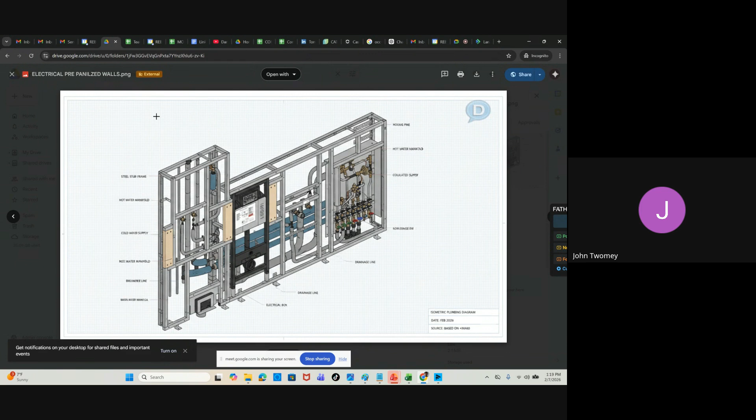No, it's something we were considering years ago, but it's got great value, this strategy. So I'm glad you gave a thumbs up on this thinking and ideation.

Ken, you're hearing from some of the giant experts here. John has already mentioned they've done 200 buildings, so you've got some serious expertise validating the approach we're going to take on your project, so you can feel comfortable and confident that we're headed in the right direction.

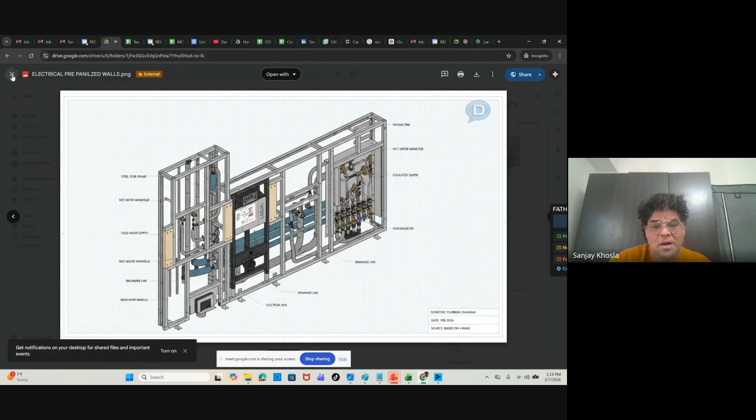I'm going to elaborate a bit more on other components I've shared here. Another thinking is a kitchen and bathroom cassette, if you will. This is another sub-assembly where on the left-hand side you have the shower, and on the right-hand side the kitchen cassette. They're intertwined, and we design the room so it's plug and play, where all the trades come in and build this cassette wall that integrates the kitchen and bathroom shower.

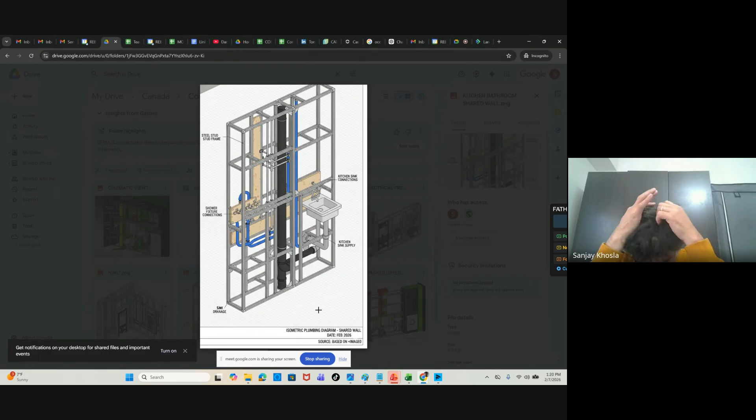Any thoughts and inputs, John, Prahrie? Would love to hear your professional thought process from a design perspective.

My comments would be the same as on your mechanical cassette. This is the finicky kind of work that should be best done in a plant.

Prahrie, your design perspective here, what is being showcased? I think John covered what I would have pitched. I've seen this before, and you can't go wrong with this. But I think John would be a better person to pitch thoughts on this.

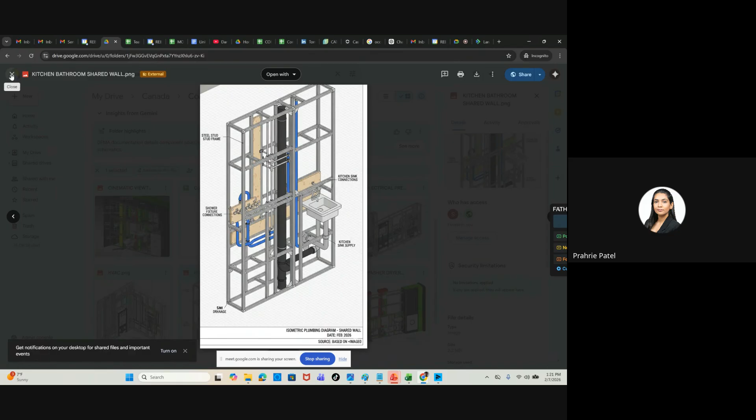The reason I'm honing in on my definition of assembly, sub-assembly, componentization - if you really rip it apart and get these things locked down, I could literally go behind somebody's garage and build my so-called components. Then the only thing that happens is the integration of how they fit together, with proper planning up front. Then you don't need those big, large factories and millions of dollars.

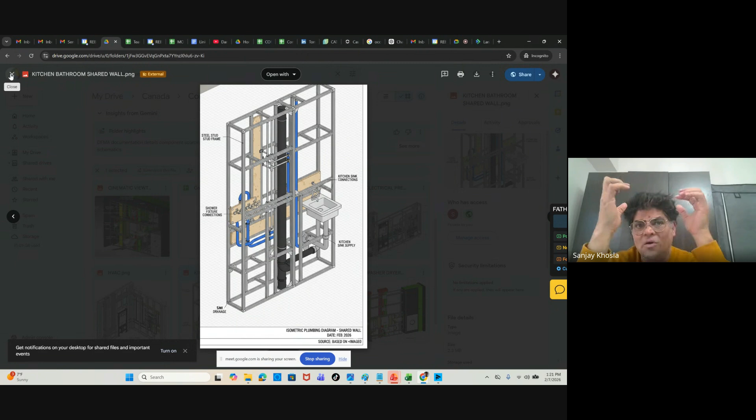Us here on the call, wearing a creative mindset and expanding our beautiful mind, we can come to that missing middle. We can be a piece of the pie, I believe, if it's approached from this point of view.

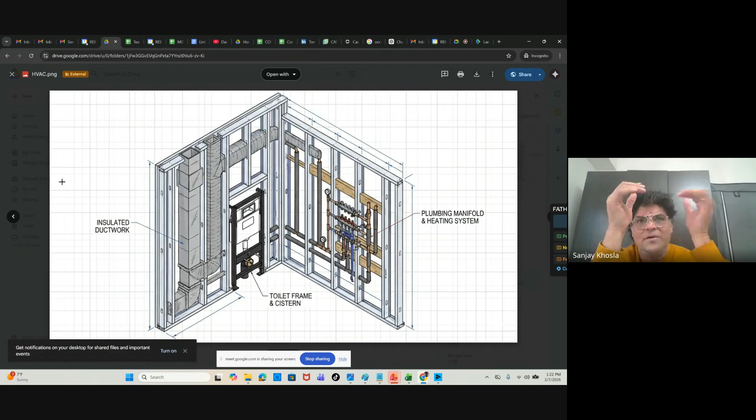So it's not just assembly, it's getting down to the technicalities and nitty gritty. Then you have another cassette for HVAC, how the HVAC is already done. That's a huge component of the mechanical aspect, and it becomes part of the cassette. You isolate the different trades and translate them into a cassette, and you've got the majority of the work done. Whether you take panelization, modularization, on-site or off-site, it does matter, but it takes away most of the burden of the complex stuff, the real trades that really cost an arm and a leg.

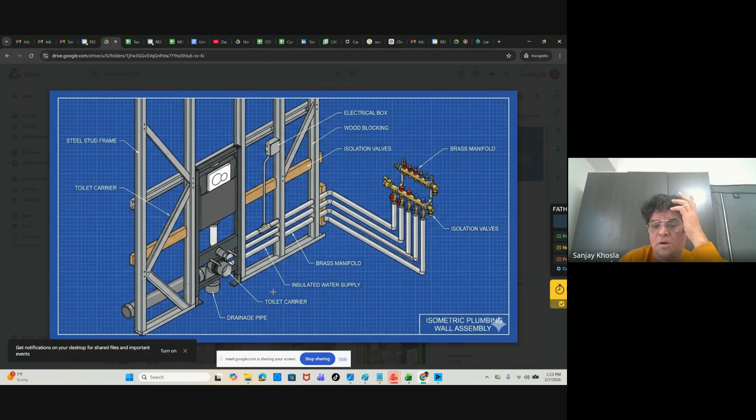And the last one, on the windows, which Prahrie is also working with in Unity Wall - these are the other different components. Being able to model this and have it MEP detailed out with cut list and bill of materials, and being able to deliver this whether offsite or on-site, is the ideation we're leaning towards, Ken.

Ken, any thoughts on what you're seeing here? I know you've done a lot of, not structural, but you said in your past life you've done some steel side of it. Is this approach giving you confidence and comfort - and I want to dumb it down - applying all these different principles to building our prototype, the 2 mods, the two 9x11s, whether we end up doing it offsite, partially offsite, or on-site, doesn't matter. But is this giving you some comfort or thought process, Ken?

Can you hear me okay, Sanjay? Yep, I can hear you. Okay, because I've had to go mobile. I've got an 11:30 appointment.

It really isn't reinventing the wheel as far as I'm concerned. There are companies that do modular aspects, like Atco, Williams Scotsman, things like that. But what I'm seeing is more of a perfection of that process, gearing it towards a residential application, which I'm looking at. So from my perspective, super excited, like I mentioned before, and I think the possibilities are absolutely endless.

Absolutely, thank you so much, Ken, and that's a real positive validation here. We're almost 5 minutes left till the top of the hour. I want to conclude this meeting, and certainly you guys can email me back. This was our first community approach gathering. If you have any ideas or want to bring other stakeholders into this meeting, I'm thinking once a month we do this kind of gathering where folks come and share ideas, and I'll get together with Ken.